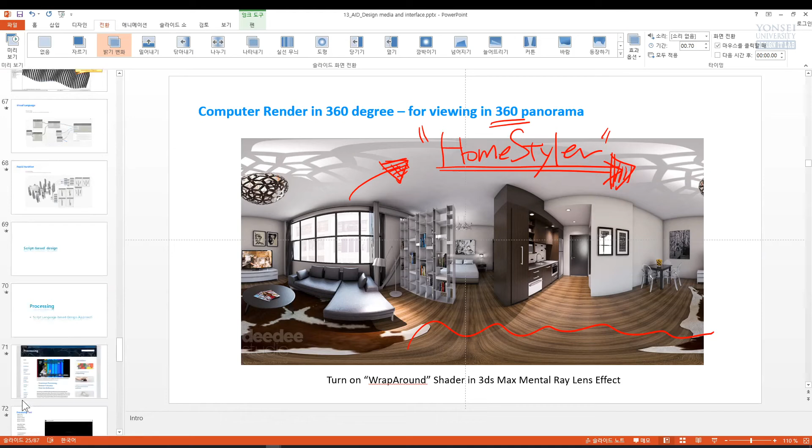Sign in. Okay, now actually it's here. Let me open this website directly. Let me show you this one. This is homestyler.com, and take a look at this one. How about this? Looking very realistic, isn't it?

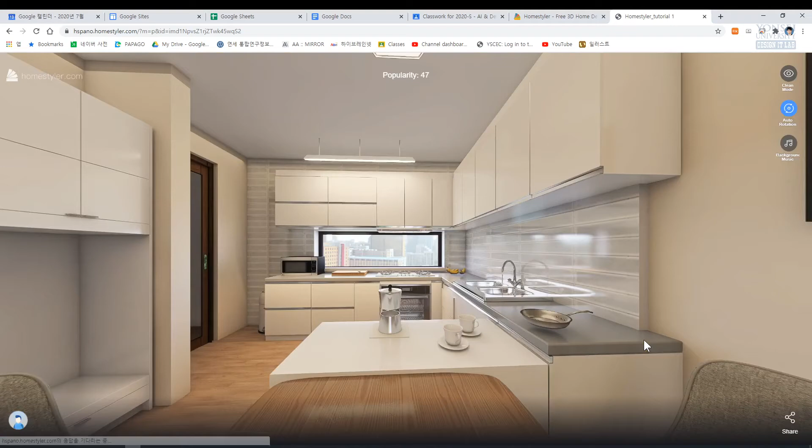Okay, my computer just crashed. Screen turned off and turned on. What happened? I'm sorry, this is my problem. Okay, let me reopen. Keep recording and showing you the screen. My laptop is actually a new MacBook Pro, but I found it's not so stable.

Anyway, take a look. This one is a really photorealistic image. But it's virtual. Take a look, the fry pan, this one. What happened? It's supposed to touch the bottom of this sink, okay? And bananas. What happened to the bananas? They are sort of evidence to show you this is computer-generated graphics, okay?

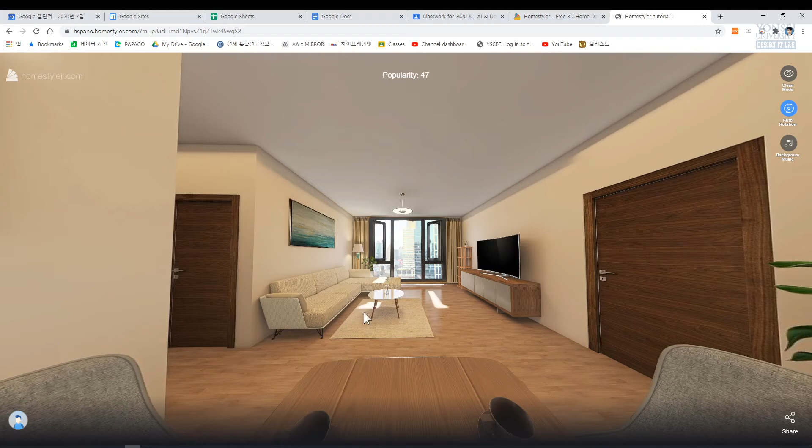Actually, this home design is GS Construction's Xi apartment in Banpo. This is Banpo Xi, okay? We modeled this one quickly using Homestyler, and the tutorial video is going to show you how to model and how to render this one. You can follow with your own design, and this is one of the possible options for you. All these components are object based.

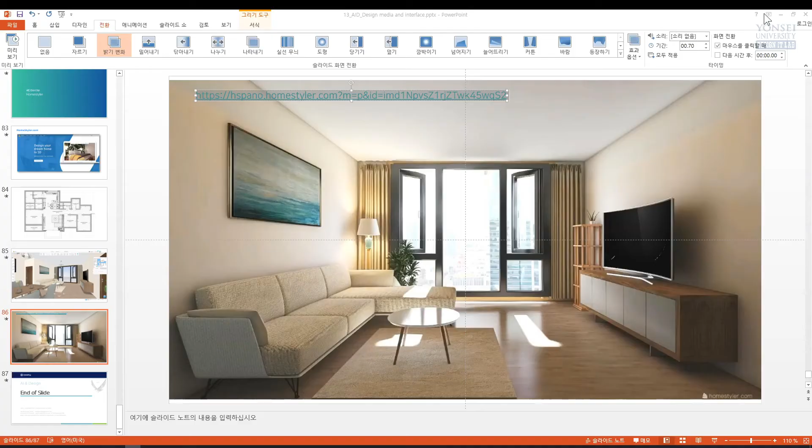You don't need to design polygon by polygon, surface by surface, point by point, line by line. What you need to do is just select your components, load them, place them, and decorate them. That's it. Anyway, this is the example I'd like to show you here, one of the examples of 360-based images.

I introduce you today to some design media and interfaces. Take a look. Designed by mouse clicks. Probably to someone this sounds weird, right? Designed by mouse clicks? What else? What if we don't use a mouse? What if we don't use a keyboard or computing interface, Apple Pencil, or my fingers on a touch screen? How to design? This is the main character of how we design nowadays using computers.

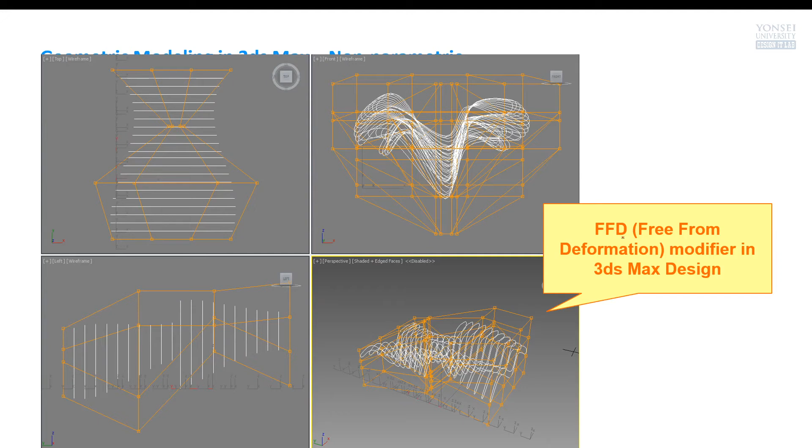This is the 3ds Max interface. In 3ds Max, there is a freeform deformation modifier. By clicking the points one by one and moving them here or there, you can control the shape of the geometry. So how to create this kind of geometric shape? How to make it? Mouse clicks. That's how we generate this kind of geometric model.

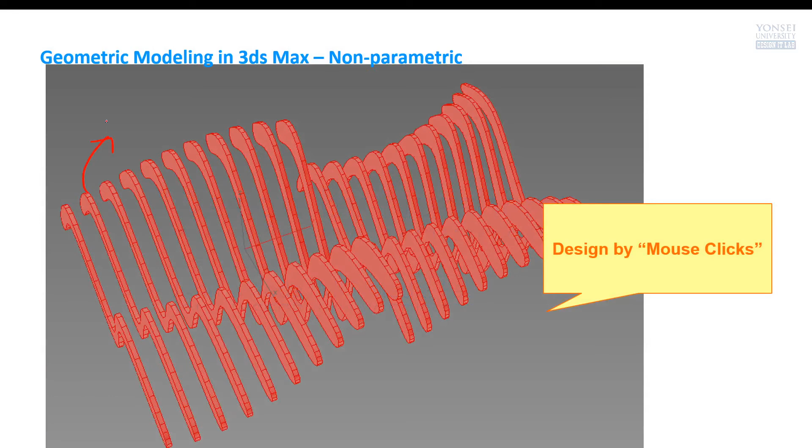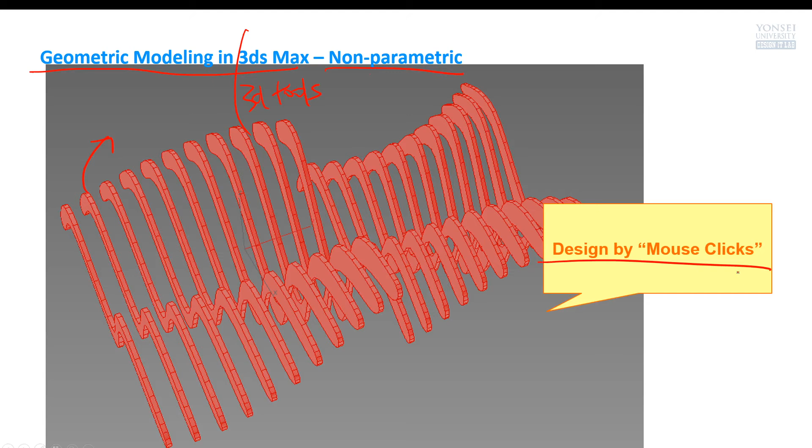Geometric modeling in 3ds Max or any conventional 3D tools is so-called non-parametric. They just use mouse clicks. But there is another one, actually more technology-based, but I simply put a name like this: designed by numbers. Actually, the original term Design By Numbers is a computer software name by John Maeda, MIT Media Lab. He used to be here and used to be the president of RISD, Rhode Island School of Design.

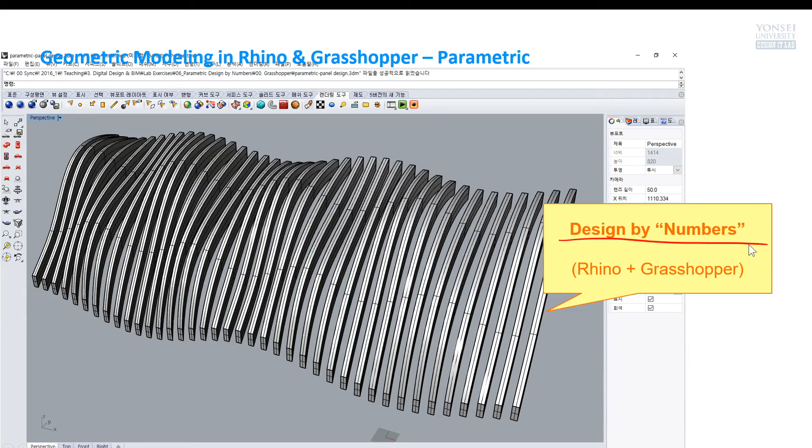Anyway, take a look. This is one example designed by numbers, using Rhino and the Grasshopper plugin. And also, this is a visual language. As you saw in last week's exercise, MS Machine Learning Studio has an interface very similar to this graphical language, visual language.

MS Azure also used visual language. There is input, output, and the node, which means a method, a function. So by using this visual language, the name of this visual language is Grasshopper. By using Grasshopper, we can create this kind of geometry behind.

So this is the visual language definition, these are the preview window, and this is the actual model view of your computer screen. Okay. So not only that kind of visual language-based, script language-based design is also one of the approaches for design by numbers, not just mouse clicks.

Okay, Processing is a very famous application you can download for free. This is a totally free design tool. This is the Processing website. By using Processing, you can make this kind of design. But you need to know the Java language. Processing language is a dialect of Java. That is Processing.

Next one is AI-based design, so-called AID. Deep learning-based design is actually too specific, but in a broader meaning, that is AID. I told you, designed by mouse clicks, designed by numbers. Number means coding, right? Or some say parameters. That is why this is parametric design. This is non-parametric design. And the next thing is AID.

Okay, that's what our class is looking for. Conventional mouse and keyboard based design, or some Apple Pencil here. New media, new interface, 360 images, AR, VR. But anyway, designed by coding, designed by numbers, parametric design, and then the most advanced one, probably we can say it's AID, right? So Revit is an architectural design tool, a BIM tool.

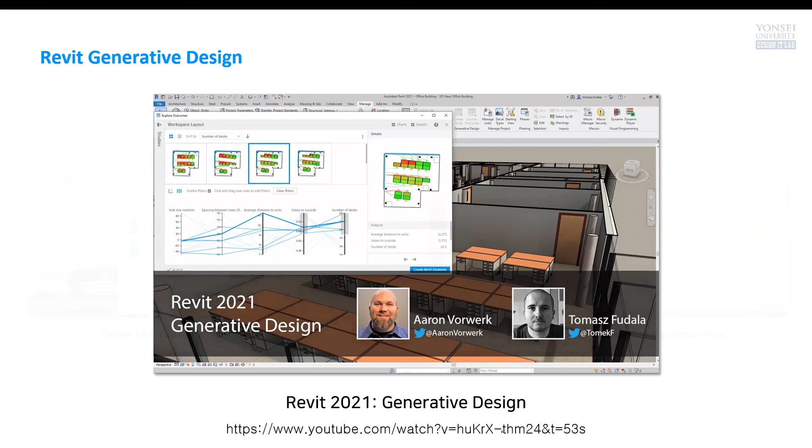If you are not an architecture major, you don't need to know what Rhino is. Anyway, Revit generative design shows you how to design by computers. So you can take a look at this one if you're interested. Okay, generative design case. And also, not only this kind of thing, in today's exercise video you can find out how to use this kind of approach, how to actually do something for AID, deep learning based design.

Let me go back to here. I told you option 2 could be one of your design outputs, but I don't want to judge the quality of your design outputs. Instead, I'd like to evaluate your approaches. What I mean is, what if you draw by hand and submit it? It doesn't fit this course, AID.

What if you do something designed by mouse clicks, such as Adobe Illustrator or Photoshop design, or some others? This is not a design studio class, I told you before. So what you need to do for option 2 is use this one. Sorry, this one, okay? AID design, AI assisted design.

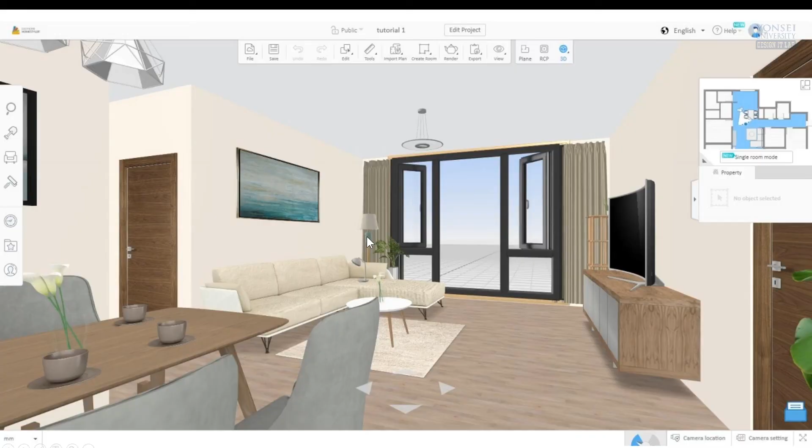Here is a quick review about Home Styler. Please take a look at today's exercise and tomorrow's exercise all together. You can watch the video, and then you can find out the reason for bringing this one, Home Styler, is very simple. Compared to your input, the output is amazing. That's why I'm bringing this one to you. This is a really easy to use web app. You don't need to install it.

Just open and log on to homestyler.com, and then you can decorate your room, even if it's a very small room, this size of room. Okay, this is your room and your bed and the desk and your chair and some decoration things here. That's enough. And here is the window. You can decorate even if this is a tiny room. Your camera here can take 360 and you can rotate the views without problem. Very powerful application. That's why I show you this one today.

Okay, this address as an example. Look, really realistic, photorealistic render output. This is a typical Korean apartment. Okay, 85 square meters, three bedroom apartment.